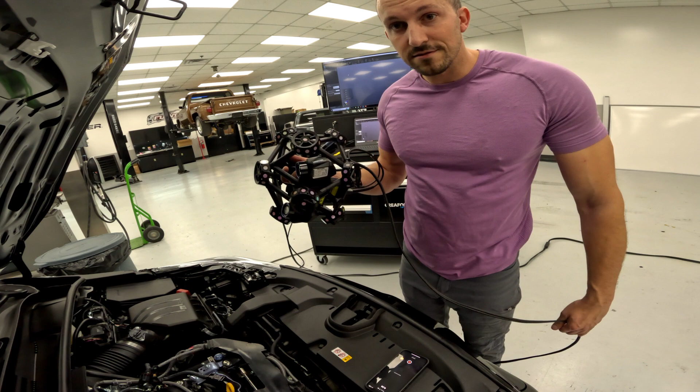So behind me is a MetraSCAN. In layman's terms, this is the soccer ball, because we've got this larger 3D scanner. This is very large compared to some of the other ones. You can get handy scanners that are smaller and things like that.

This just makes life significantly easier because I've got a laser, or a C-track, over here that essentially just locates this in space. You can see on the monitor behind me—I don't know if this is going to pick this up or not, we'll find out. Maybe not. But that locates this in space in relation to what I'm scanning, so there's a frame of reference for this to pick up on. So we're going to scan this and see how it goes.

For reference, in this situation I'm trying to scan this inlet tube for the intake, for the fresh air feeder that goes into the box, which is this piece right here, and then the intake box itself. Then the next step will be I'll pull this intake out and scan this entire area without the intake in there for the mounting brackets.

And after that, I'll scan the box by itself outside of the car. This way, when I orient everything, it'll all snap back together and the box will be able to be hidden or suppressed in software like SolidWorks. And this way you can begin designing your own parts.

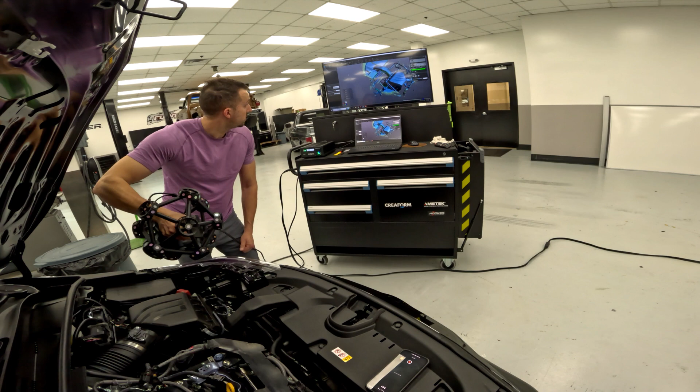So I'm really just kind of going slow. I don't know how much that's going to pick up, I don't know how much my GoPro is going to pick up, but you're just kind of going over the same area a couple times. You're trying to get rid of as many holes in the scan data as you can, this way in post-processing I don't have to go back and spend hours trying to fill them. So let's see.

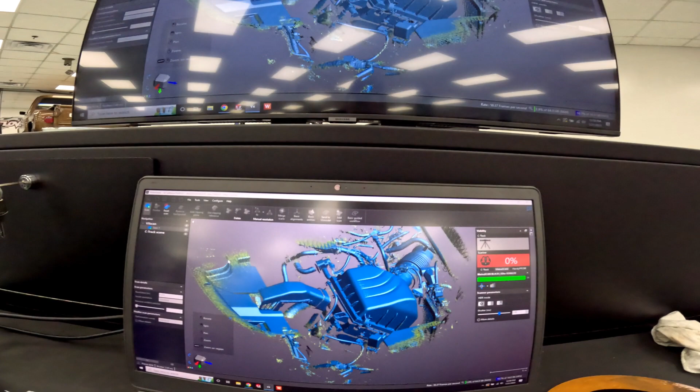I'm going to pause for a second there and bring this over this way you guys can see what I'm scanning. So I really was only focused on the driver's side, so I'll have to go back and continue to touch up on the passenger side. But that's what the scan data looks like. This is the actual intake itself.

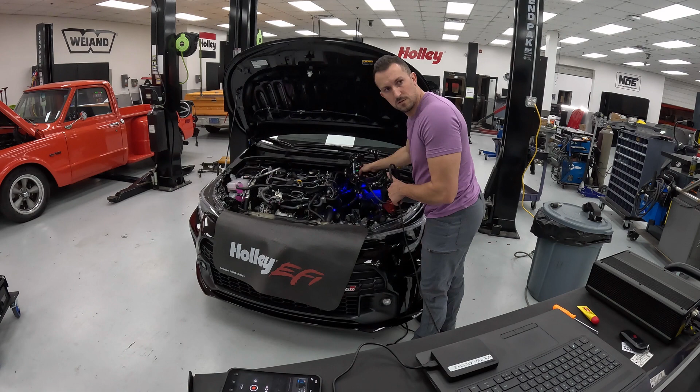So what I wanted to do, since in the video you see the hyperlapses of me scanning this area in the car, I figured it might be worth showing what you're seeing afterwards, and the process for how it goes from me scanning that empty area in the car to designing parts and things like that. So basically what you're seeing right now is a fully surfaced engine bay, or at least the area that you see me scanning in the video.

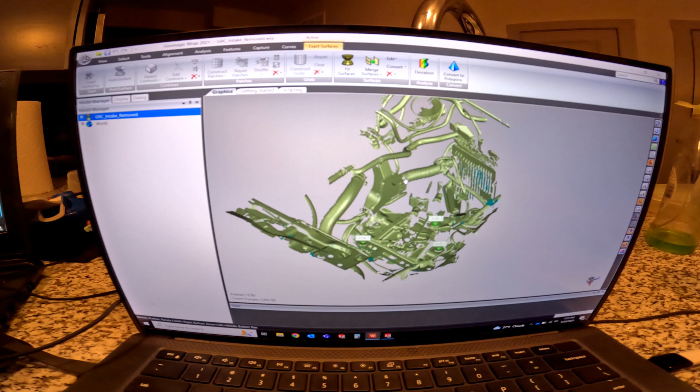So when this first comes in, it's not this gold color, just for reference—I'll explain in a second. Basically, this is just the scan data that's received by that scanner, and then it's put into this program called Geomagic Wrap. There are other post-processing programs, this is just the one that I use.

And so you come in here, you'll see it'll be considerably messier, honestly, and you'll see how not everything was picked up by the scanner. So you've got these kind of holes here. Now you can choose to go in and use things like features and curves and tools and some of these other aspects of the program.

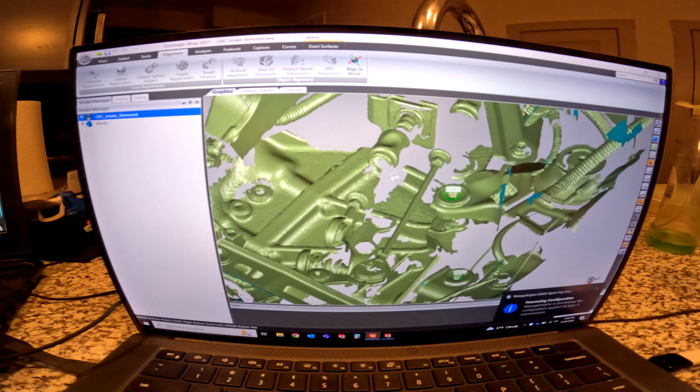And you can create bridges, and the program is actually pretty impressive at being able to fill in a lot of these holes and make it pretty close to how it should be. Every once in a while you'll get some kind of really odd surfacing that happens and it just looks really poor, and you just go in and delete it and try to make it a little bit better.

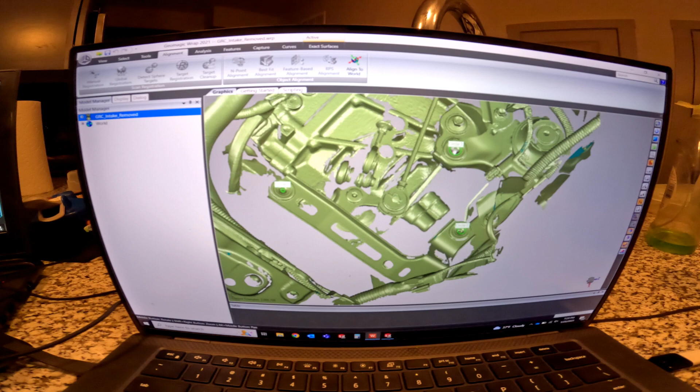But overall, the main thing in this case that I was looking for was this mounting point right here, which is a mounting point for the lower box. You've got a secondary mounting point and a tertiary mounting point, and that's really the main things you're looking for, because in this situation the mounting points aren't going to change. So that's clearly one of the most important things. The next most important thing is going to be pretty much just the size of the box.

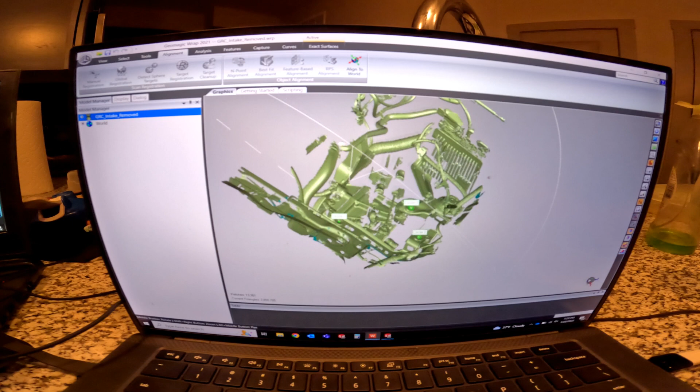So I've captured some of the wiring looms, the edge of this splitter for all the hoses and everything, and then it just kind of gives you a general idea of basically where the box can go, that it's not going to start interfering with other aspects in the engine bay.

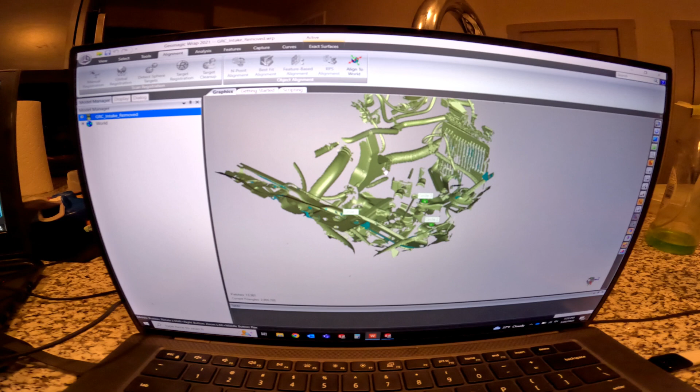Obviously you don't want to take the time designing an intake, printing it—more than likely it'll be 3D printed as a sample—and then putting it in here to find out that, oh crap, I didn't design this correctly and it's hitting something before it's even inside the box.

The other thing is over here, this is the fender support. So this is where the intake duct would normally be, and obviously with hood clearance and everything, you have to make sure the box is going to not only clear this, but when the hood's closed, you're not ramming the hood into the top of the intake box.

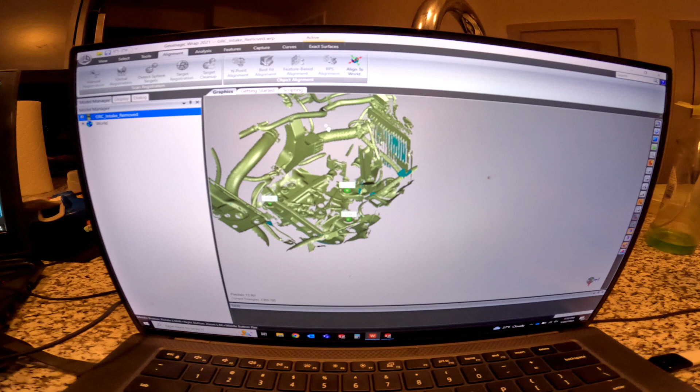The other thing that will be incredibly important is, if I can get this to pan correctly, this right here—this is the factory turbo inlet pipe. So the intake tube has to mate up to this, unless you're planning on designing completely your own turbo inlet pipe.

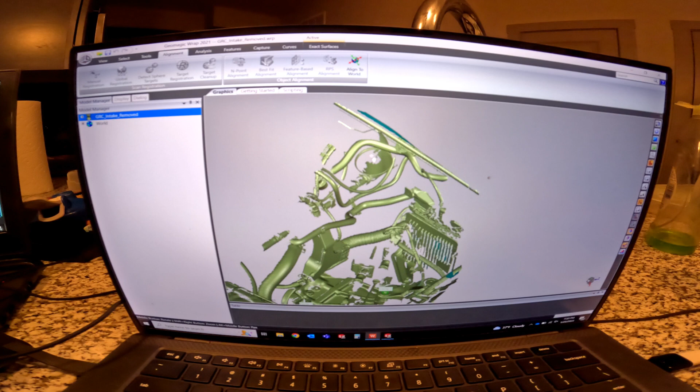You obviously want the inlet coming off your aftermarket design box to mesh up to this, whether it's similar diameter, but you also want it to be within range of this so that you're able to fit a silicone coupler or something like that.

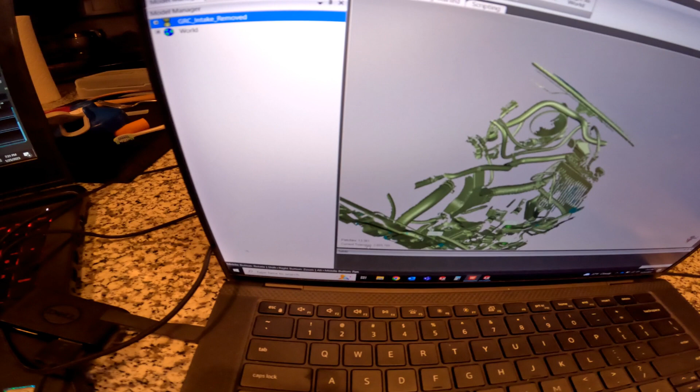So what happens is, to start, I get just kind of a mess of scan data. I go in, I trim down all the extraneous stuff that I don't need, because down here it's probably not going to get picked up real well. This particular scan data, which was trimmed down pretty heavily, is currently 2.85 million triangles.

I think when I brought it in, it was like 8 million. So I decimate it and bring it down probably about 40% of what it is, which just basically means when it goes through surfacing, it's faster.

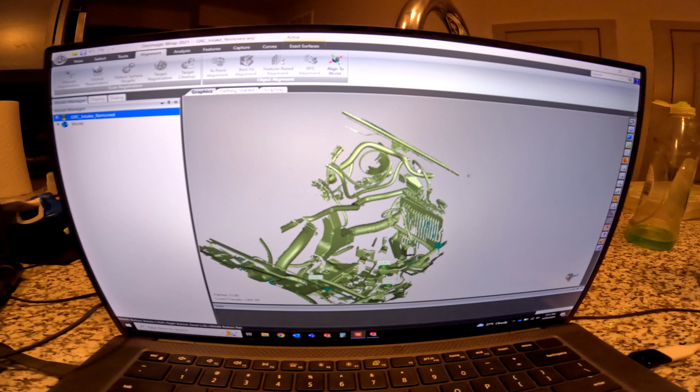This is incredibly intensive on my computer, so I try to make these files as small as possible. You also end up running Mesh Doctor, which just kind of helps smooth out some of these rough edges and things. Some of this stuff looks real nice here, but when you bring it in, there's a bunch of sharp angles and things that the program detects that aren't picked up initially by the human eye.

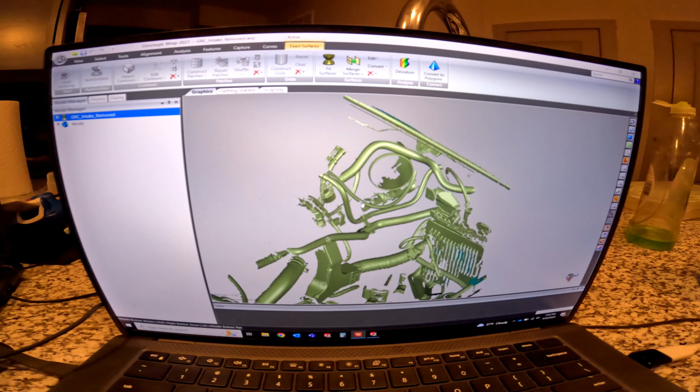And then this goes through exact surfacing where it just gets auto surfaced, and then it's just kind of a waiting game. At that point, once that's done, this gets saved in a different file type and brought into SolidWorks.

And this is now where I can actually do the majority of my actual design work. Sorry, I'm trying not to mess with people's eyes.

So basically what happens here, when you bring this in without surfacing it, you see how there's a lot of surfaces. Initially you can see it's just this kind of smooth gray area. Well, if you don't surface it, it just stays as that smooth gray area, and essentially there's nothing you can build off of—you can't make planes off of any of the surfaces.

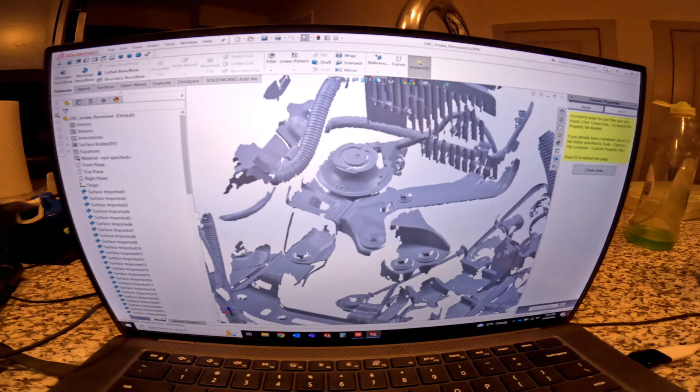But here you can see I can select these corner edges, I can select these corner points, I can choose points here and make a three-dimensional sketch and make planes in order to design off of. So it's things like that that are how you basically start your design process.

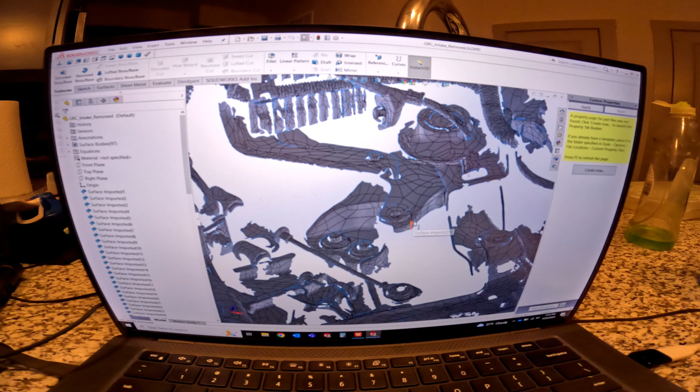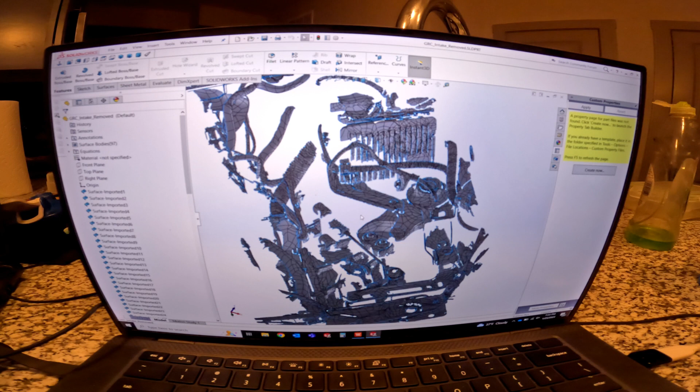So surfacing is pretty much the first step into how you would design one of these. I just figured it was nice to give people an idea, show you how the product design side of it works and how I go from the real car to scanning data, to SolidWorks files, and from there I can actually start designs.